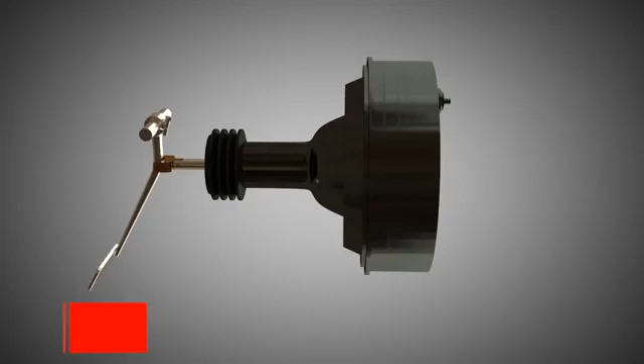Vacuum brake boosters are part of many vehicles. A vacuum brake booster usually consists of the following components. At the rear of the brake booster casing, a vacuum connection is located.

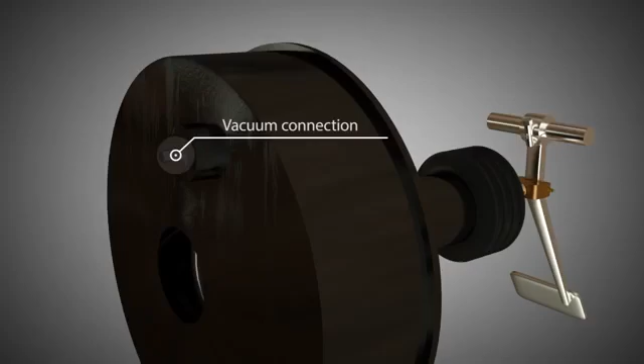The brake pedal transfers energy from the driver's foot to the vacuum brake booster.

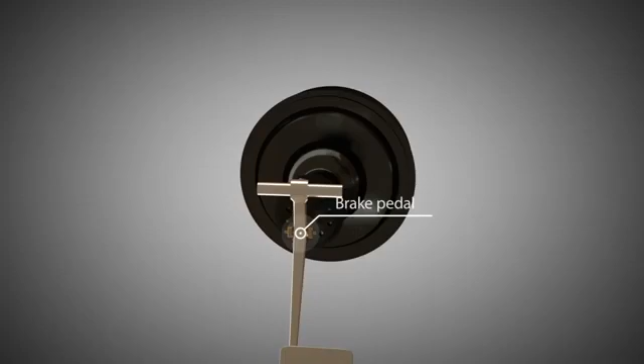A diaphragm separates two chambers from each other. Usually, it's a rolling diaphragm with a diaphragm plate. In this animation, however, it's a very simple flexible diaphragm.

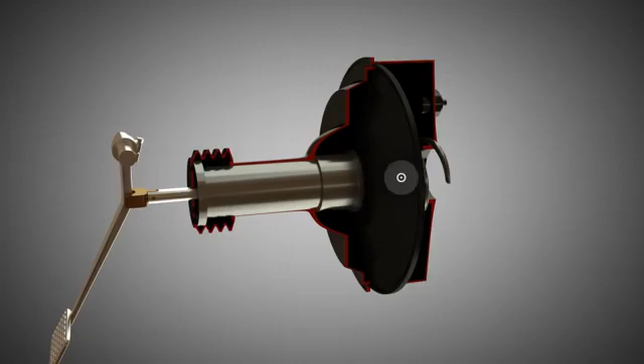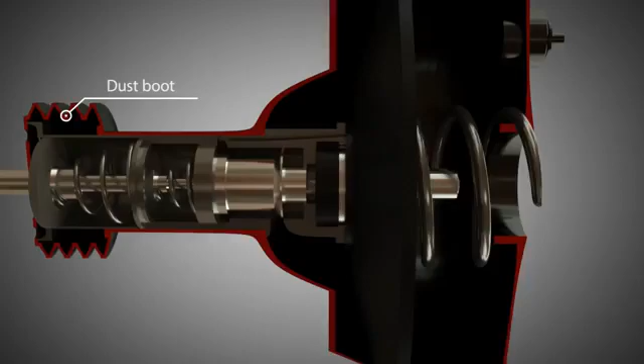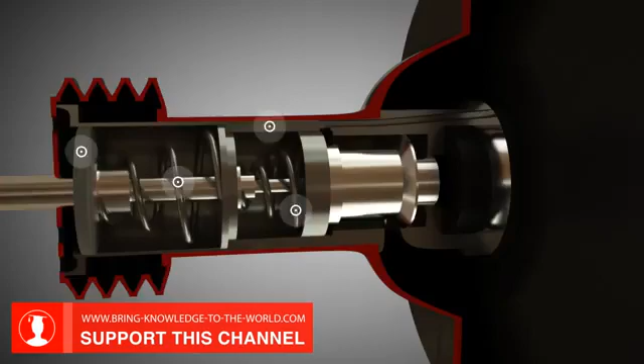A dust boot is used to protect against dirt. The control housing contains an air filter and two springs. In addition, the control housing contains a poppet valve, a valve piston, and a rubber reaction disc.

Atmospheric pressure is shown here in blue. Since the dust boot is perforated and the air filter is air permeable, this atmospheric pressure is present in the front part of the control housing.

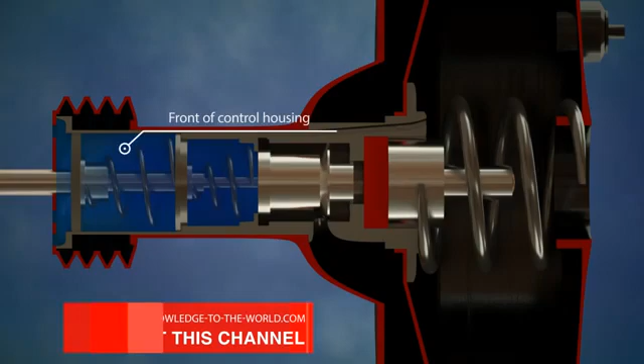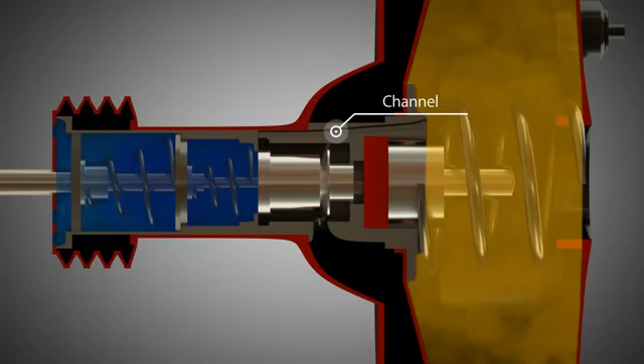The vacuum connection supplies the vacuum chamber with vacuum. Since the vacuum chamber is connected to the pressure chamber via channel, vacuum is present in the pressure chamber. The vacuum is provided either by an engine or by a pump, as in the case of diesel engines.

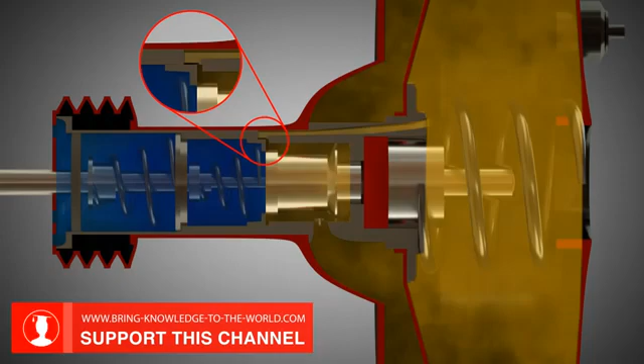As soon as the driver depresses the brake pedal, the poppet valve separates the chambers from each other. The valve piston then presses on the rubber reaction disc that is deformed due to the force of the valve piston. Consequently, a connection between the front part of the control housing and the pressure chamber is established. This creates atmospheric pressure in the pressure chamber.

The pressure difference between the two chambers increases the braking force until the driver does not move the brake pedal further forward. Finally, the poppet valve disconnects the front part of the control housing from the pressure chamber.

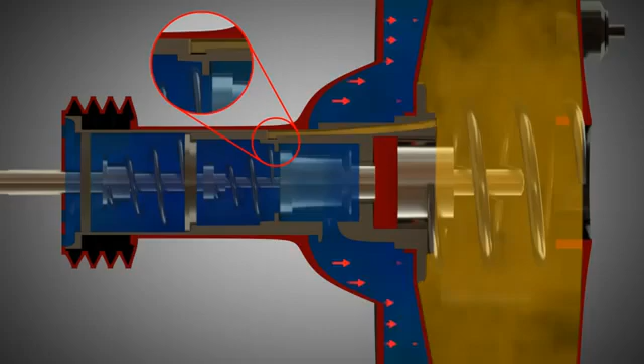During full braking, the connection between the front part of the control housing and the pressure chamber is permanently kept open. Pressure is constantly exerted on the rubber reaction disc. The atmospheric pressure exerts its full force on the diaphragm.